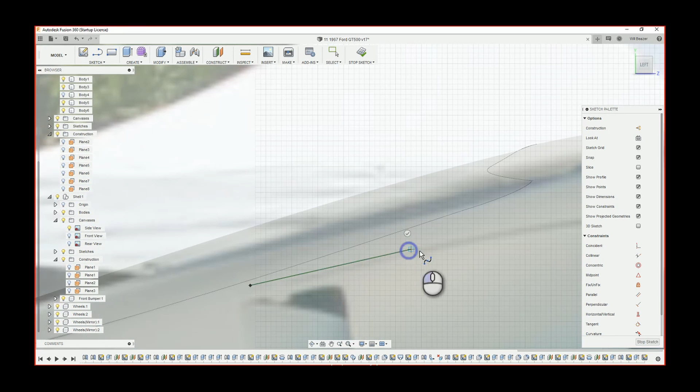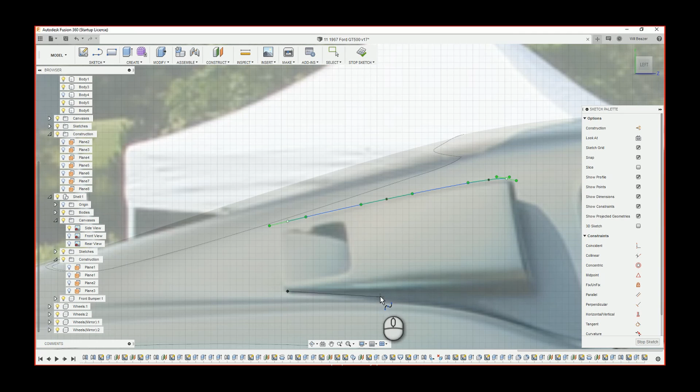So I'll start. The main topic of this episode today is the rear intake. I haven't really done too much investigating into the importance of this, because as I understand it, I don't think it's a rear-engined car. It might be, but I don't think it is, because there's also a front intake on a lot of these, so I believe the engines are at the front.

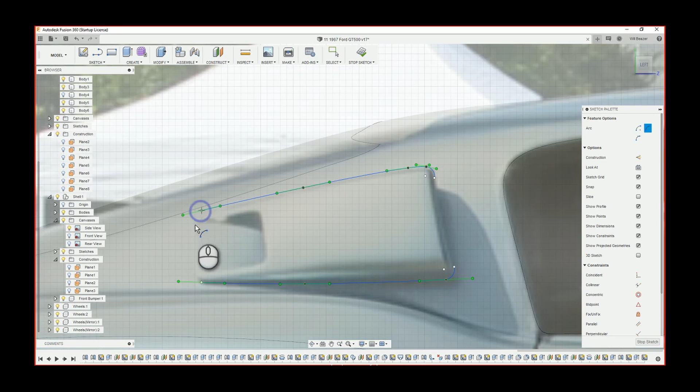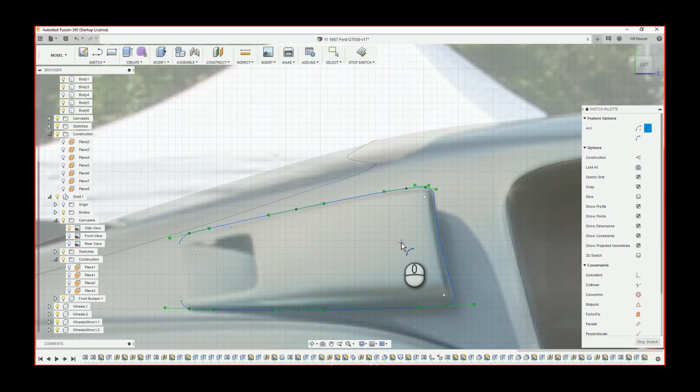Anyway, so I start by sketching the perimeter from the side view. At this point in time, this was probably the obvious way to do it, but looking back, I could have probably just used the sculpt workspace, because this shape in particular is very abstract - there's no sharp lines to it, no exactness to it. So I feel like you'd probably be able to get away with having just a more fluid shape through the sculpt workspace.

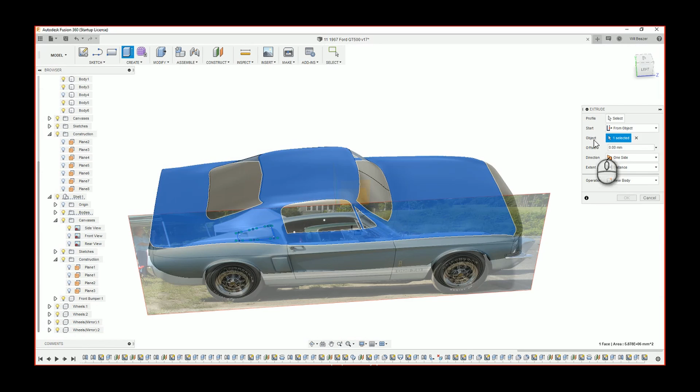Anyway, so after sketching the outside, I want to extrude it. As per usual, we're going to be extruding onto the surface, so that way we follow the curvature of the car.

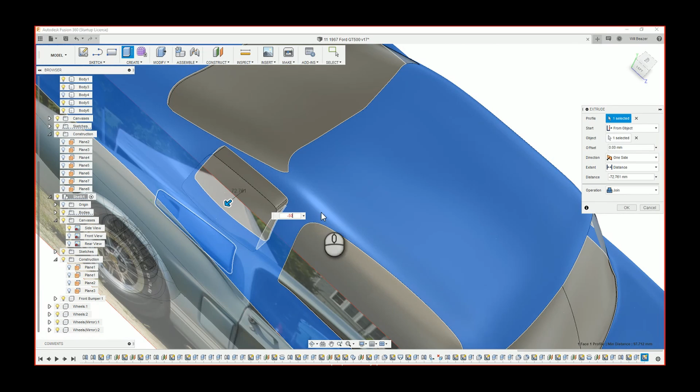It's not perfect what's happening here. I wish it was a bit thinner at the back. The way you would do that is you'd use surface tools to create a more accurate shape. It's something that on SolidWorks was different, but it was very obvious to me on SolidWorks how you use it, and on Fusion the surface tool is a bit weird.

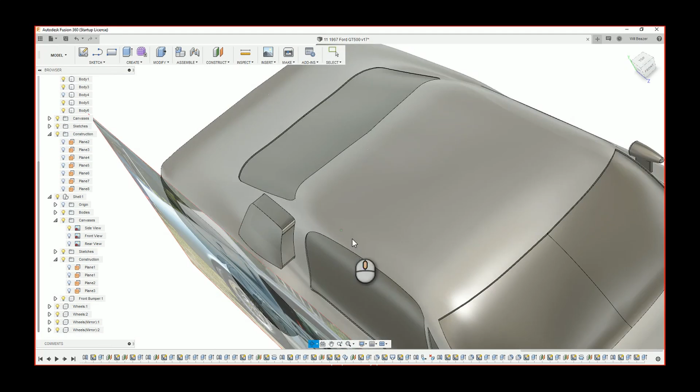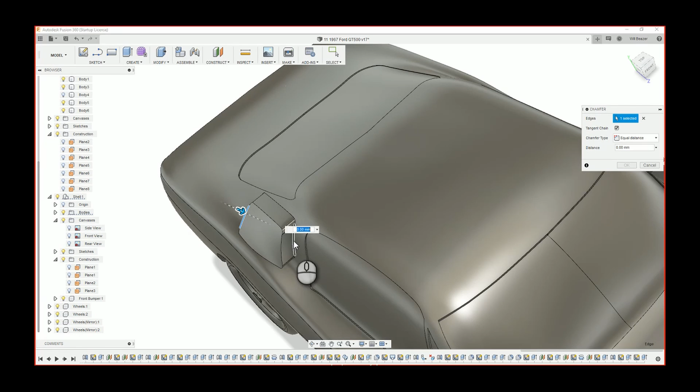So I'm not talking about sculpting the car, which I might have referred to before as a surface tool - technically you are, when I was making it, creating a thin surface, a zero thickness surface. But when I'm talking about surface here, I mean the patch tool, like all the zero thickness, standard geometric shapes, and you can actually use them a lot more productively to get the result you want.

So after extruding that onto there, the next step I want to do is add the entrance for the air intake.

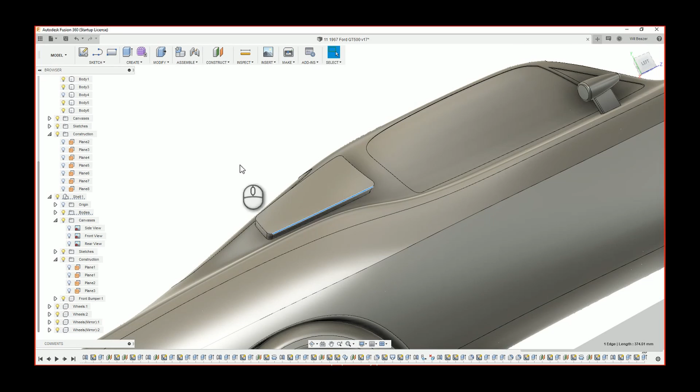I think this video is quite interesting in that it's cut down by half, just because of simple things. For example, I try to fillet this edge perhaps later on in the video, and it just goes terribly. This edge is not the one I'm referring to - this seems to go fairly okay, but actually...

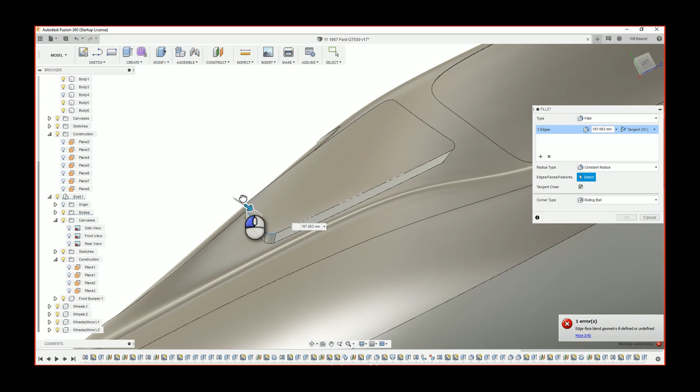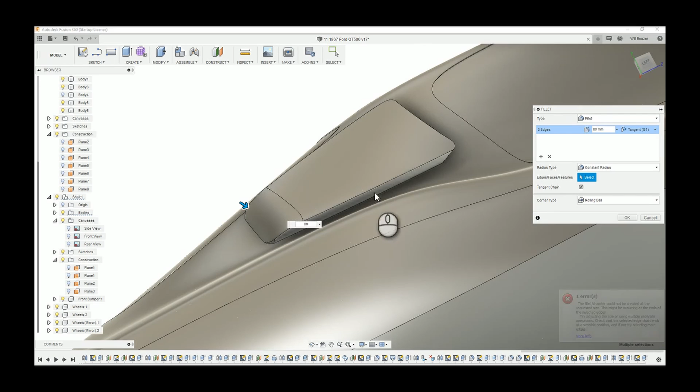Originally I wanted to just do a quick curve on the back, like it's about to do. Hang on - not quite that much, I don't want to create a weird curve. I just want a small curve. I've also had to cut out a load of footage of just screen freezes - you can see a lot more errors appearing, and things generally slowing down. So there's that curve I was quickly talking about.

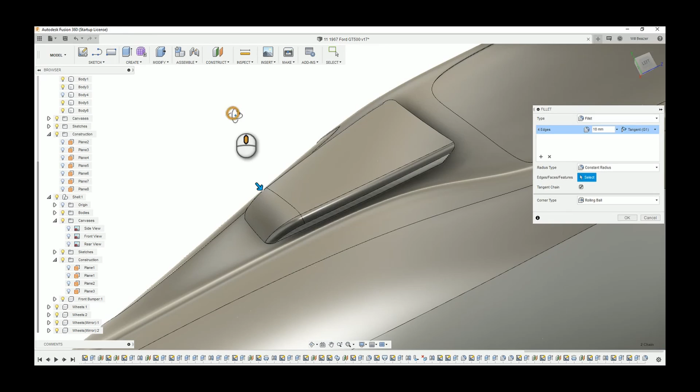Originally I was thinking this will suffice, and for a lot of the video it's actually in the background. I thought it was acceptable, but after I looked at it a bit more, I didn't feel like it was acceptable. I know I say a quick model, I know it's been like 6 hours, but it is supposed to be quite a simple model. But the idea that it would just be curved at the back without the extra exhaust of it seemed unnecessary.

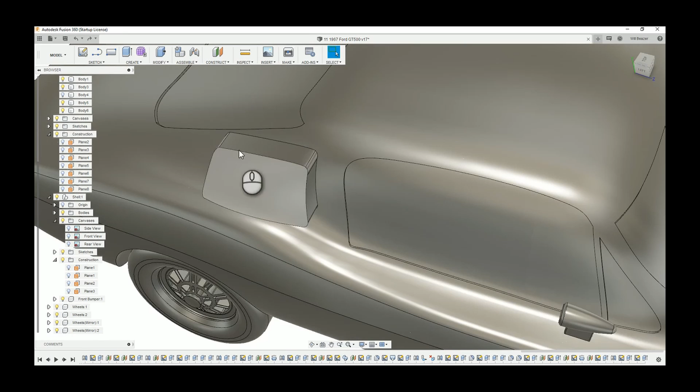So now what I want to do is create that front intake section on the - or not, back to filleting. Sorry, I've been spending such a long time messing around with this software, I'm not even sure if it's going to record, so forgive me for my pauses. But yeah, just studying the numbers on the screen.

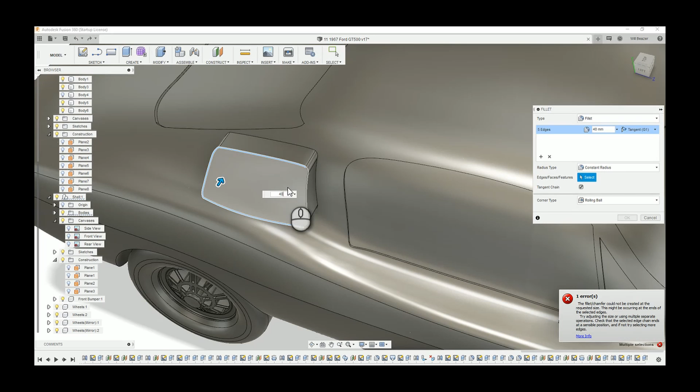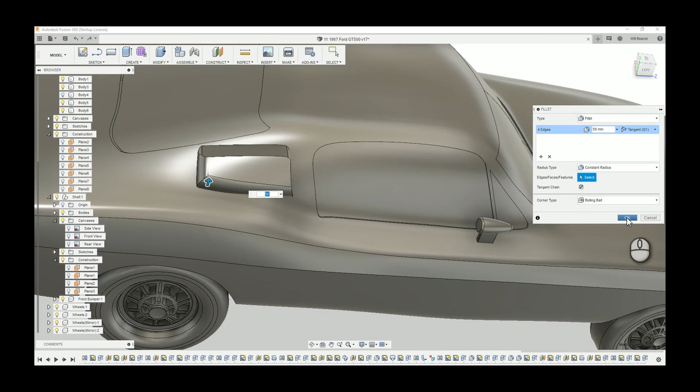So, filleting this edge - it's unnecessary, and like I said earlier, I think you'd be better off just making this shape in the sculpt workspace, which after I finished this video and this project, I went back and changed, because this bit stuck out too much in my opinion, and I didn't feel like I could control the shape of it very much because it's extruded off the surface of the car. By that kind of thinking, it means I'm very limited - unless the shape of the car is perfect, this fender is not going to be perfect.

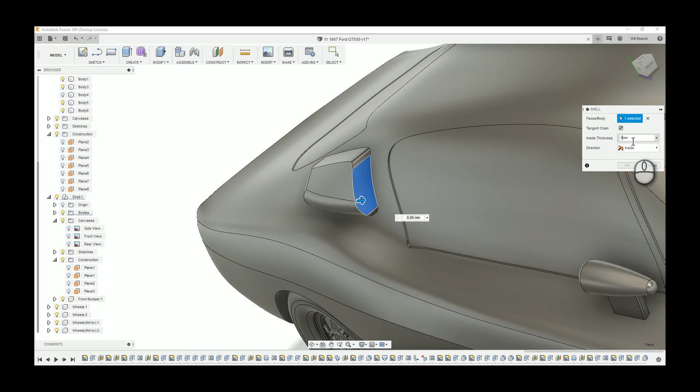It can only be perfect if I've modeled the car 100% correctly. So there was another quick crash. Yeah, quite a few of those happened.

So now I want to be modeling the air intake on this front section just here. And after, again, that was a quick cut there. I had to cut out quite a few messed up attempts of doing it.

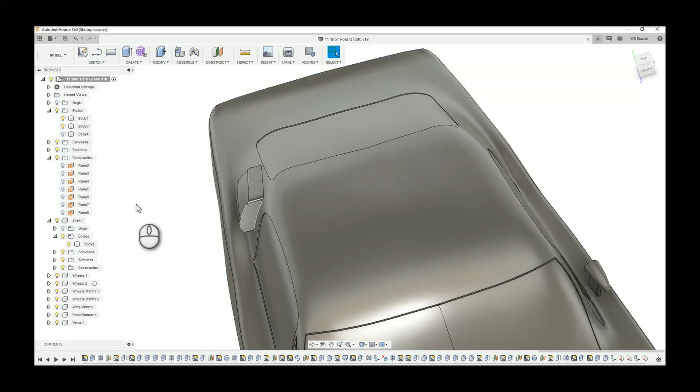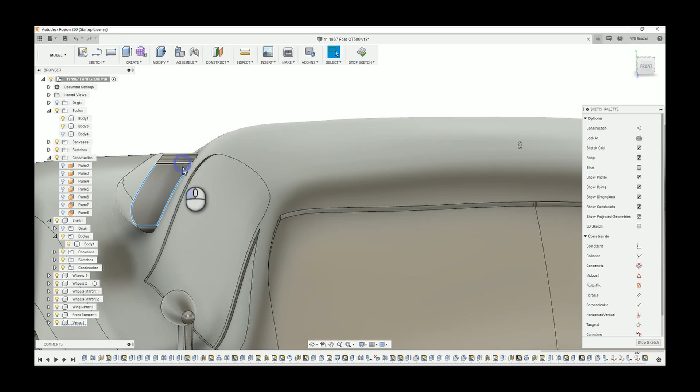So the quickest way for me to do this is to just create a sketch from the front plane, offset the features. So I'll project the features first, even, then I can offset them.

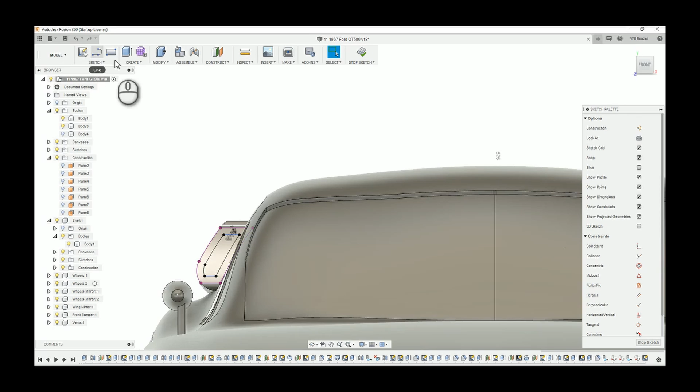One really great thing I've noticed about Fusion since I've upgraded my computer is that everything with your online account works brilliantly. I mean, you can work offline on it, but Fusion 360's connectivity is fantastic. So moving across to my new computer, all I did was download the program and enter my details, same as before, and it saved all my preferences, like my key bindings.

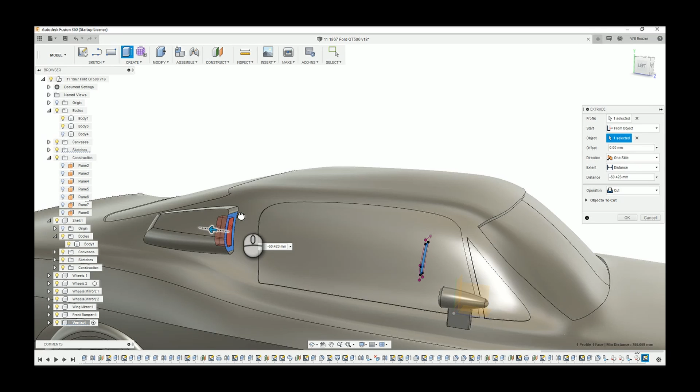That's like a real pleasure. But yeah, just here quickly extruding that back. Obviously I don't want to extrude it through, and you can change the angle of the extrude, but yeah, you can see how slow the laptop was running then.

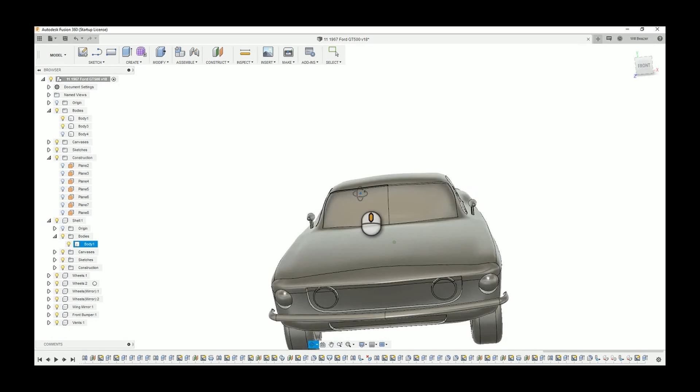I think this is a huge reason why I didn't take this into like a 7 or 8 hour project, was just how slow it was getting. So the good thing about the new computer I've built is I should be able to record these projects much more quickly and efficiently. So cut to further ahead.

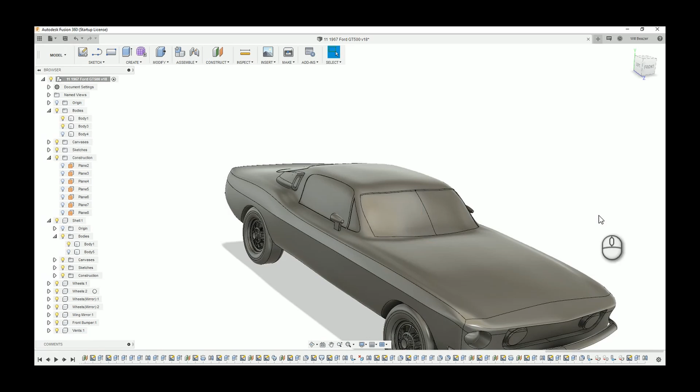After some failures of mirroring this across, about 5 minutes of failing it - no, that's not, that is the failure - after about 5 minutes, eventually, I managed to mirror the parts.

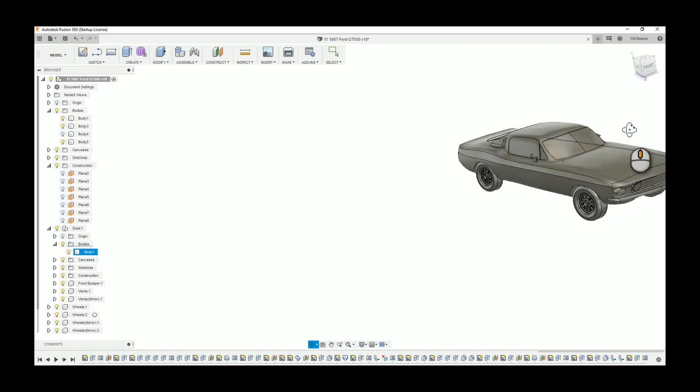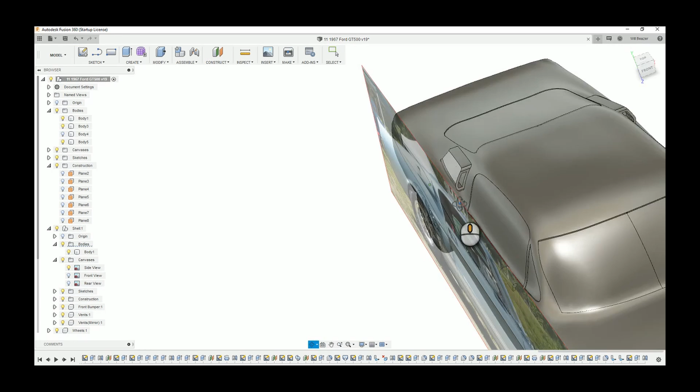What I did was join them all as a component, grouping them all under one component name to make it easier to mirror across, rather than bodies and features. Sometimes you get errors from just mirroring bodies and features, because the computer wants to mirror them all at the same time, but you need your extrude to happen before your cut, which sometimes isn't obvious to the program. So if you turn it into a component, those bodies and features are just grouped under one shape, so that can be mirrored quite easily.

It's like taking a circle and cutting a triangle out of it to look like Pac-Man. If you wanted to mirror that across, it would work in Fusion. Something more complex wouldn't, but this is just for example. So you try to mirror the circle, then the triangle cutout - it wants to do those two things at the same time. On a simple thing, it will do those correctly, but on a more complex shape with more variables, you tend to get a few errors. So what you want to do is just group them as a component, and then it's as if the circle with the triangle cut out is just the shape of the original shape.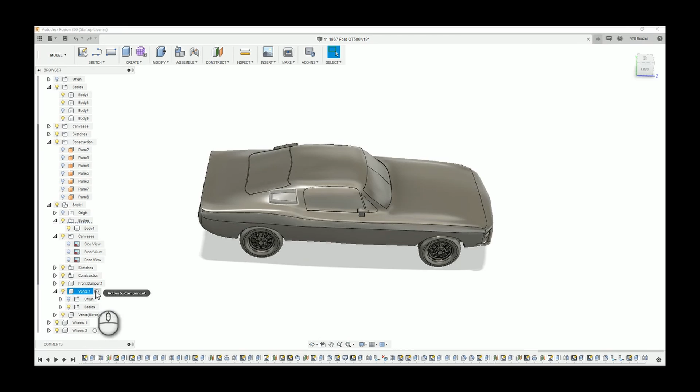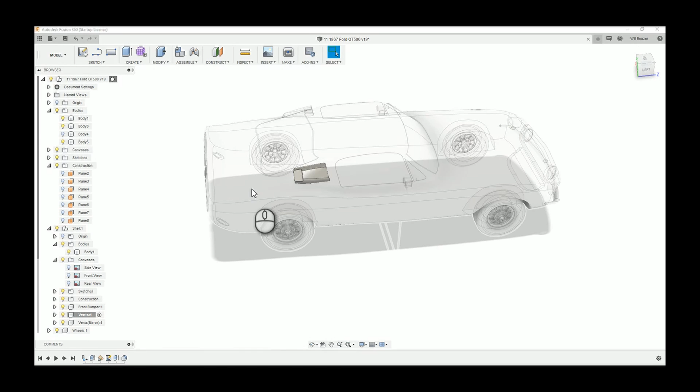So here we go, filleting this rear edge. That took me a much longer time than I care to admit. Just the amount of freezes that I was getting with the screens - I think it was like 3 or 4 crashes I had just videoing this section alone. It was painful, honestly.

And yeah, so that's kind of that on the rear fender, and what I'll probably go do is group it as a component or mirror the feature across. So I'll see what happens, but I hope you've enjoyed this episode. I hope the volume is okay. I hope the quality seems just as good.

You never know, it might be considerably worse, or it might be a lot better. I'm yet to find out. It might be an absolute nightmare to try and export it all. I am glad I changed.

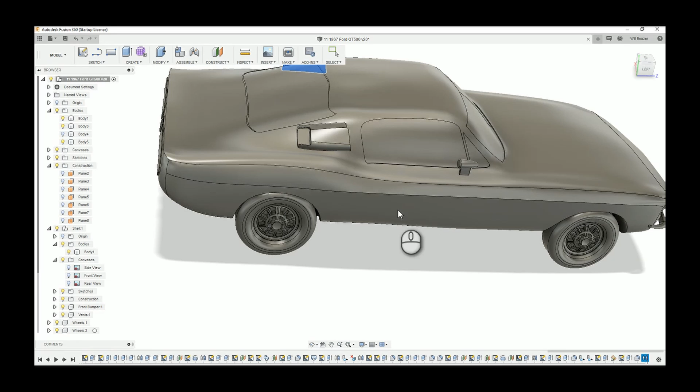It's just too expensive for things like Premiere Pro, especially when you're very much a hobbyist of video editing. Like CAD I do a lot, and Fusion's great because for a hobbyist license it's free until you start earning over - I can't remember if it's $1,000 or $10,000 or $100,000 - but yeah, it's free until then. And Premiere Pro just costs a fortune, so it's nice to have a free thing that I don't use very often.